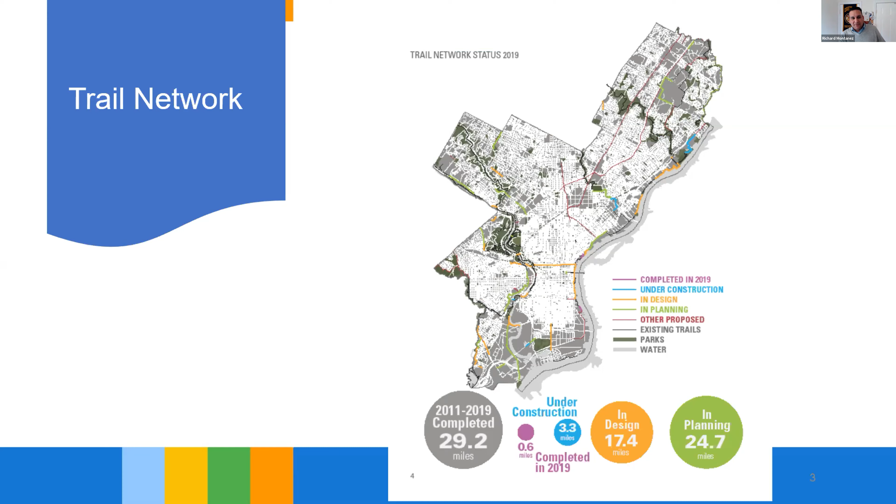This works great because it connects to and adds to the great trail network that the City of Philadelphia has, and we continue to grow it. So we keep expanding the high quality bike network throughout the city and those areas where people can jog and bike safely. But what I really wanted to talk about is what Philadelphia has done in the COVID world when it comes to pedestrians and things.

We've actually provided more outdoor spacing for our restaurants and cafes. We do realize that restaurants are a vital part of this community, and they're local businesses. They're the ones out there all the time. They're the small employers who employ a lot of residents, citizens of both Philadelphia and Pennsylvania. So we decided to start working with them to come up with some ideas of how to adapt to COVID rules, how to maintain 6-foot spacing.

So we went out there and tried to reopen the restaurants safely after they were closed for about 30 days. It was tough. They were only allowed takeout. We did create temporary regulatory regulations that allowed loading zones without them having to apply for permits. All they had to do was request them at will.

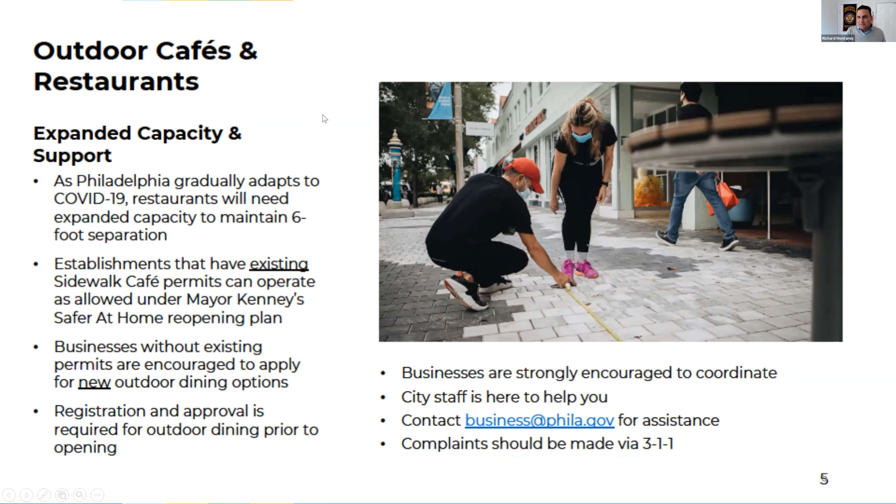So we have 4 types of what we call streeteries, and it's quite interesting on the word. It became, as there is an entire restaurant task force, the word streetery comes from because I work for the streets department. So I like the word street, and so it just ended up being streetery.

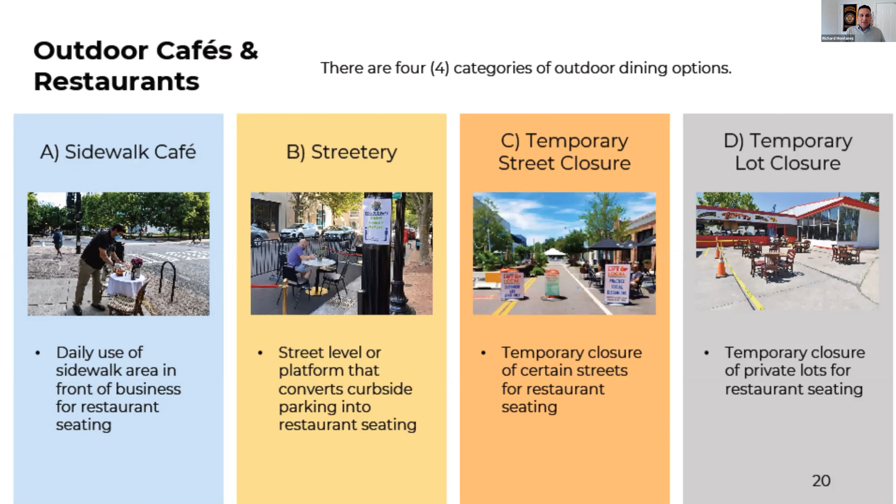So we have several types of streeteries out there: sidewalk café, what we call a streetery which is actually physically in the street where we temporarily close the streets, and then obviously we are encouraging parking lots and things like that.

Some of the drawings that we provide - this presentation is normally about 70, 80 pages long, so I had to quickly cut it down just to get it into the 10-minute presentation that we have. But what we do is we provide footprints for the businesses of what they need to do, what's socially acceptable from the City of Philadelphia, from the health department, from L&I, streets department.

So they all get this guidance that's on our website and anybody can access it. Please feel free to use it, distribute it, where it shows what you should be doing. If your sidewalk is 10 feet or more, this is what you can do. If it's less than 10 feet, we do not allow streeteries, and this has been an ongoing battle with some of them as we keep enforcing the rules and regulations. But as you can tell, I mainly kept the drawings that we provide, the layouts, as guidance for our restaurants in this presentation, to show them what they've got to do.

One of the biggest things we found during inspections was that they were putting tables on top of cellar doors. That is not permitted. We don't allow it.

It was interesting because we had to keep this very fluid as the COVID rules changed from 2 seating to 4 seating to 6 seating. The City of Philadelphia is currently back to only 4 people per table, so we have to keep our website up to date. We're also now looking at winterizing, putting in outdoor heaters—some gas, some electric, some propane—so we've been working with the fire department to see what's allowed by code.

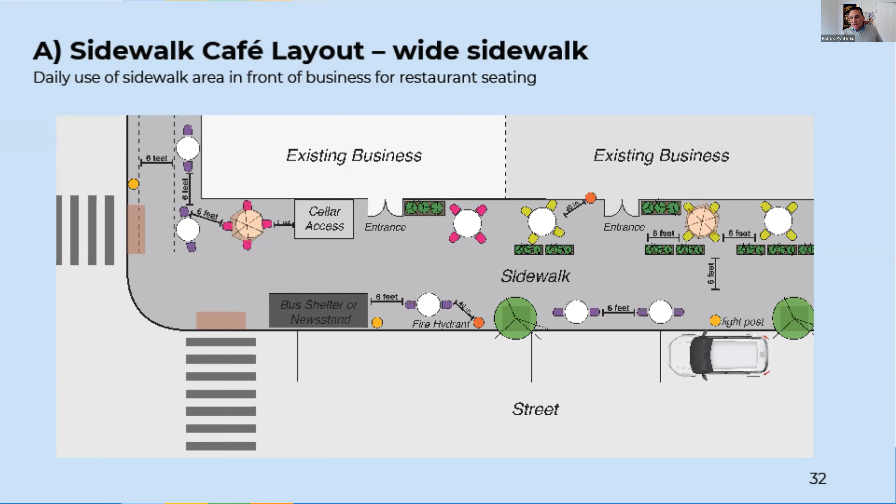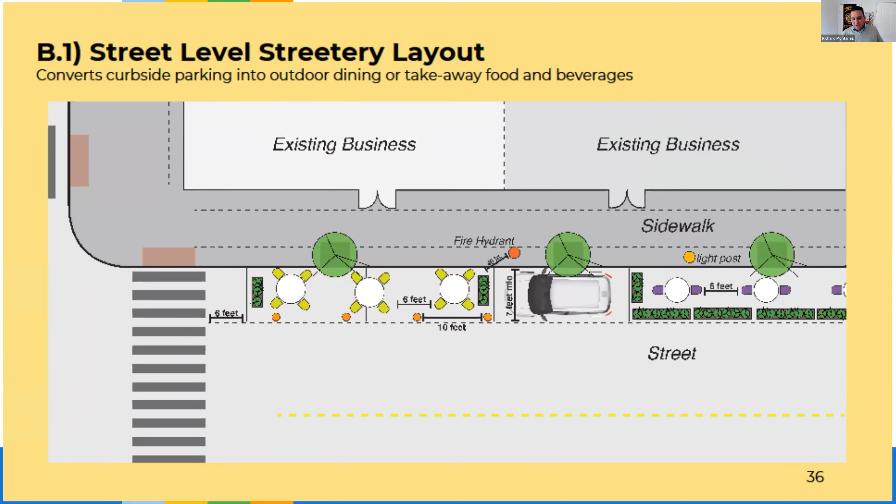This is one of the first streetery examples we provide. As you can see, we still provide some parking, and you have to keep certain distances from the fire hydrant—you have 7 feet to go. There are barriers we're asking them to put in, crash-worthy barriers, so people feel safe eating out there. If you walk through Philadelphia, you'll see these keep changing as we head into winter.

Some are starting to build platform streeteries. This came about because of the ADA issues we were trying to address at the same time. So while you were still eating outside, we wanted you to have ADA accessible tables. If you have one on the sidewalk, we consider that your ADA accessible table. If you're using the street, we were requesting that you make that ADA accessible.

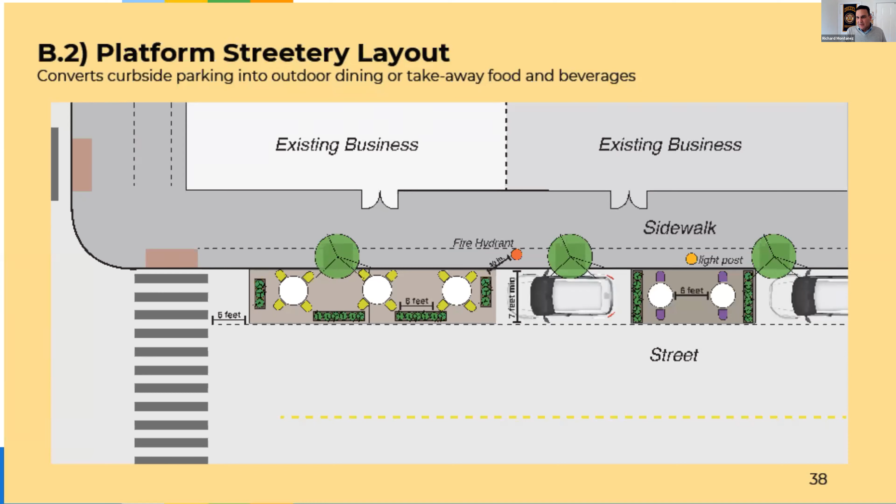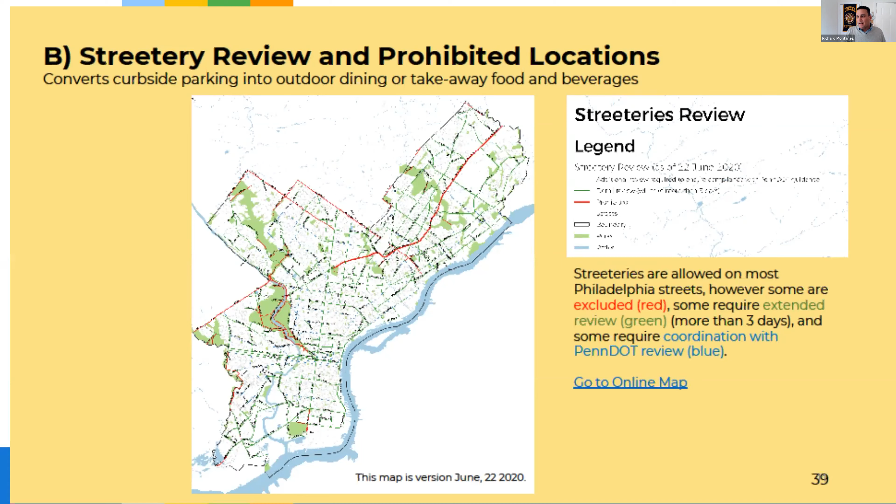We also put out a map—I apologize, I tried many times and it keeps coming out blurry—showing the areas where streeteries are completely prohibited. This was quite controversial in the beginning. Most of these are state roads where streeteries are prohibited, like Broad Street and Market Street. However, if your sidewalks are wide enough, you are allowed a sidewalk cafe.

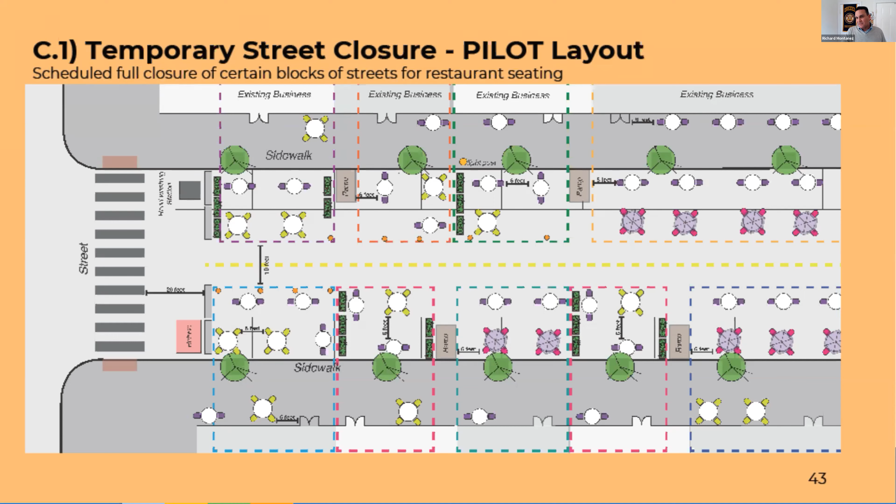Here's an example of a street closure. We do something like this in our Midtown, where we completely close the street down and put in a 10-foot pedestrian and bicyclist walkway. There are signs up, and bicyclists are encouraged to walk their bikes through this block, but in the meantime it provides access to everyone. As you can see, we also provide ramps so everybody can be accessible.

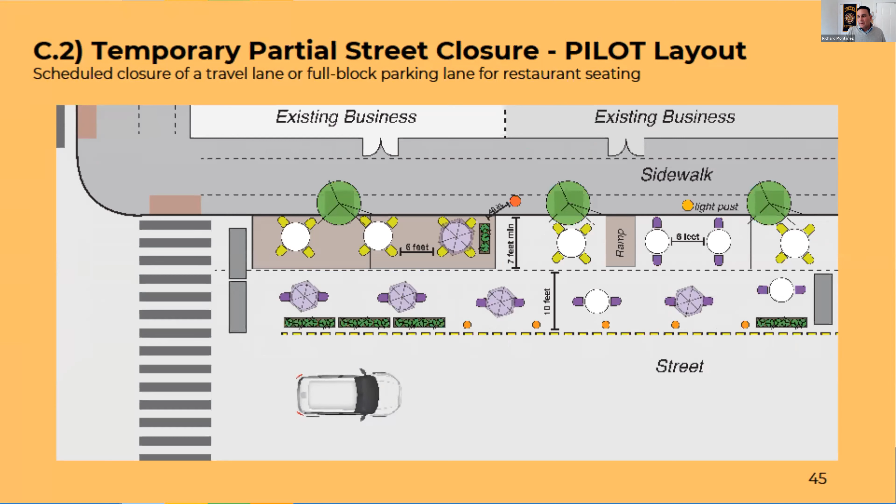This is a partial example of what we're currently trying to create. We're doing samples of this on Rittenhouse, where we're allowing one travel lane while still providing outdoor dining for restaurants. We feel this is going to be the ongoing example of what the City of Philadelphia will probably remain as.

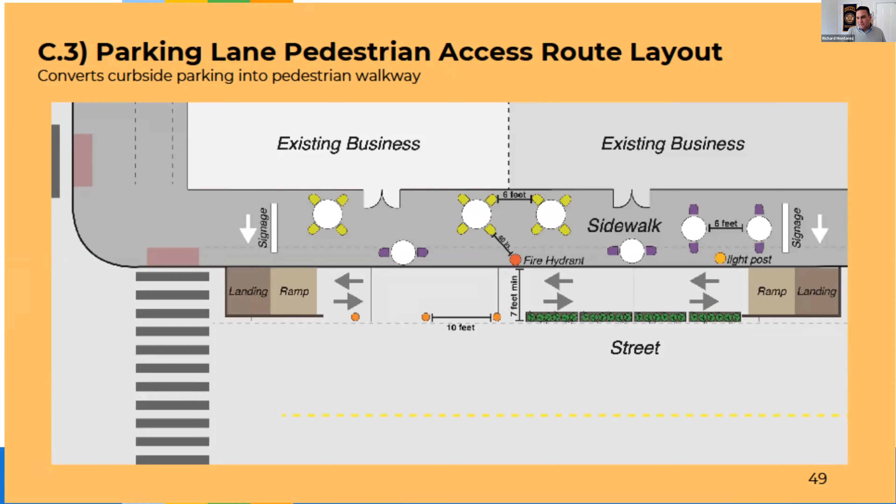Obviously, there are some cases where instead of using the parking lane for a streetery, it actually becomes the pedestrian access area—providing the proper pedestrian and ADA accessible area while still addressing businesses and things like that.

We also encourage private parking lots, and we work with them as restaurants bring tables from inside out and put them outside, to maintain social distancing, make sure all the proper COVID regulations and rules are in place, and that they're still able to conduct their business and serve people.

There will be more of these as we winterize the areas. We're dealing with tents, air exchange, airflows, and all the necessary requirements from the health department.

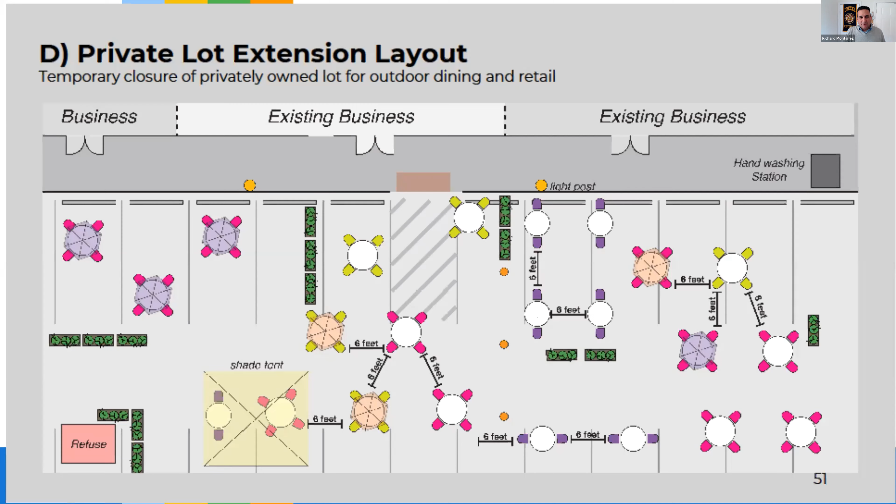With that, I'll try to move quickly. I'd like to say I was the one who did all this, but I didn't—there are literally 30 of us from the City of Philadelphia working on this every day, going out there, inspecting streeteries, and looking at how to make it better.

I want to tell the group that one of the biggest things—on Tuesday I was out at Manayunk Main Street inspecting streeteries—and everyone came to us and said, can we keep them? Because these are actually slowing people down. One side effect we've noticed from doing streeteries is that vehicular volumes have completely slowed down. Where we used to have 25 to 30 miles per hour, they're now going 15 to 20 miles per hour in the areas where the streeteries are. So we feel the safety impact is there. We just want to make sure we put a proper design in the public right of way that both FHWA, PennDOT, and the city would accept, to make it safer for everyone.

So with that, I want to turn it back over to the group because we're waiting for questions at the end, and I believe I got it on time. Thank you.

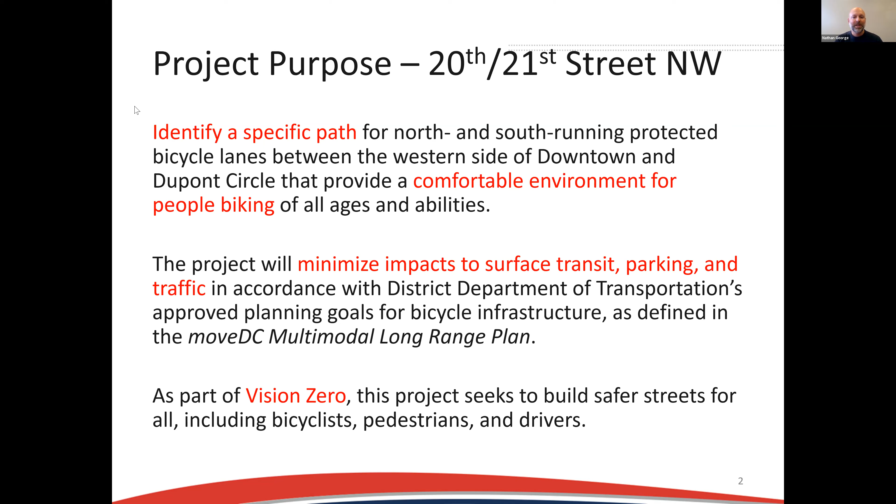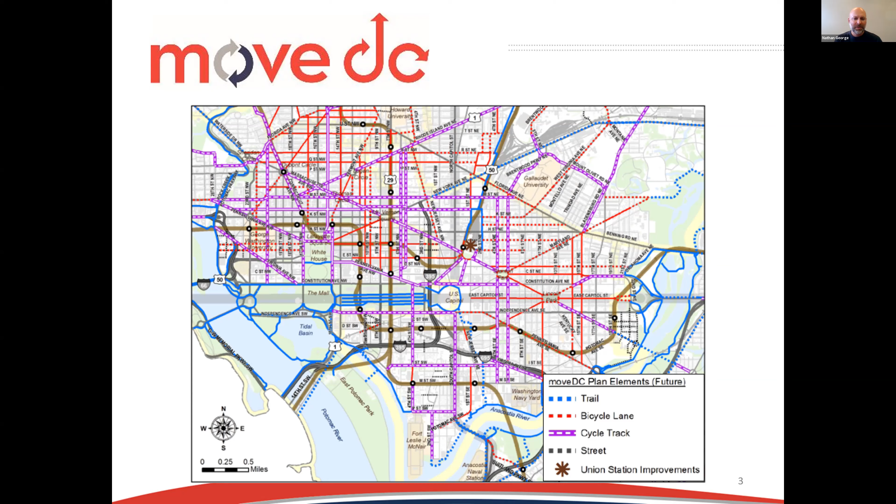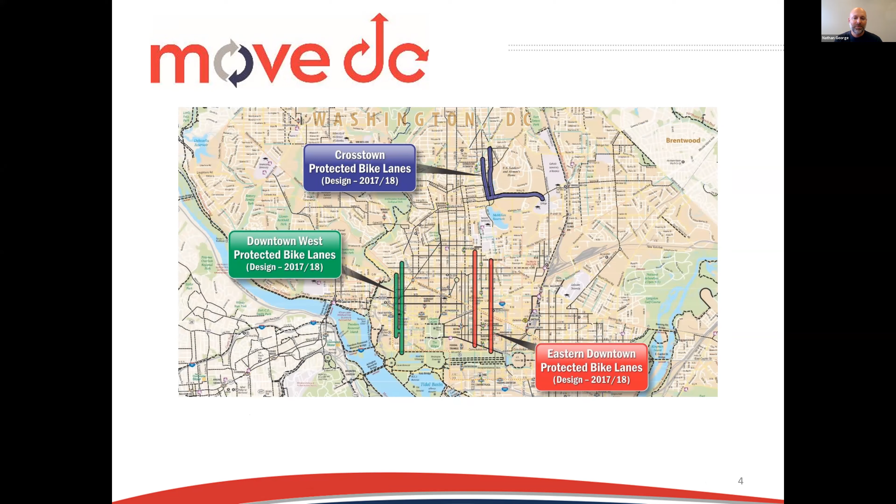Our task included 3 separate areas of DC. It was roughly 10 or so miles of area that we were covering, doing planning and design for these key facilities. We'll focus primarily on the lower left side, the green bike lanes in Downtown West, but we'll also have some highlights from the crosstown shown in blue at the top, and the red lines, the eastern downtown section. So I'll touch on each of those, but primarily we're focused on the green lines.

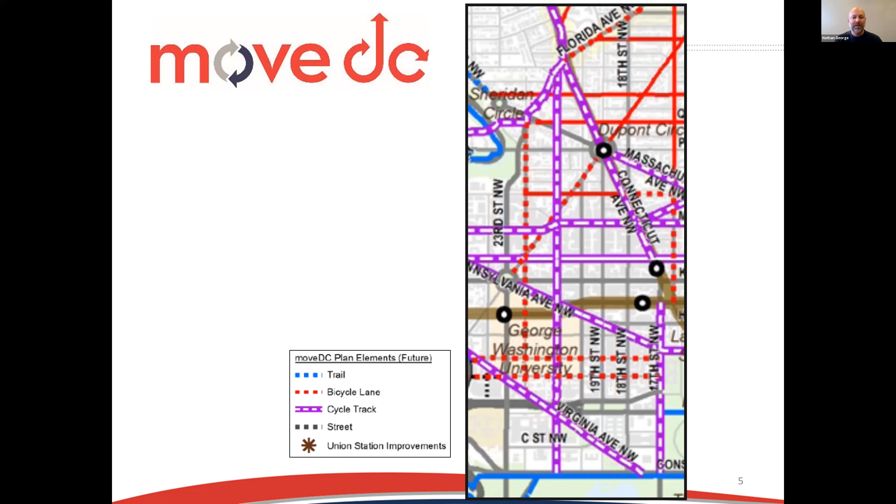In the Move DC plan, that plan envisioned putting a facility on 21st Street, the purple line that goes north to south, shown in this excerpt from the plan. When we initially started the task, DDOT came to us with the objective: let's look at that corridor, but let's look at the parallel streets to see where the facility would be most appropriate, and also what the appropriate design of that facility would be.

So we had to identify the appropriate street and also identify what the facility type would be. One highlight that really stands out when you look at this map showing the existing bike infrastructure is that there's good east-west connectivity and a little bit of diagonal north-to-south connectivity in the northern portion of the study area, but there really is no north-south connectivity. That was the focus of our assignment.

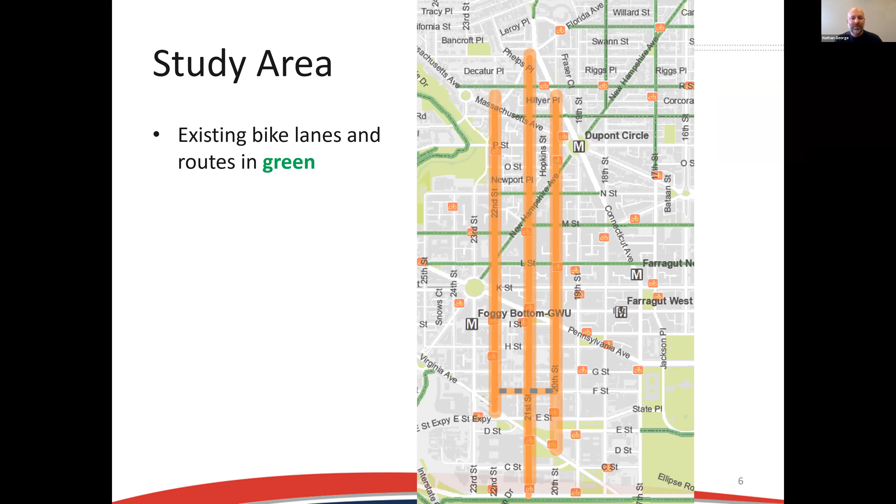When you get started on a project like this, it's very nice to have the opportunity to study and determine what's appropriate without having a pre-described facility to design or plan. Having multiple opportunities—different streets we could look at, different facility types we could incorporate—was very beneficial. Fehr and Peers started with a very robust analysis of the opportunities along each of the corridors, and some high-level considerations to help us pare that down to a more manageable task of reviewing individual facility designs.

We couldn't look at everything in a detailed design, but we could at least conduct a screening, and that's where this flow chart comes in. We knew that providing one-way bike lanes on multiple streets would be too impactful, since that would require a lot of parking impacts. So it really limited us to looking at two-way facilities.

To look at two-way facilities, we needed to look at the impacts along each street on either side to identify a preferred side of the street to review. We were looking for things like parking impacts, high volume driveways, or any condition along the street that would be an obstruction difficult to design around.

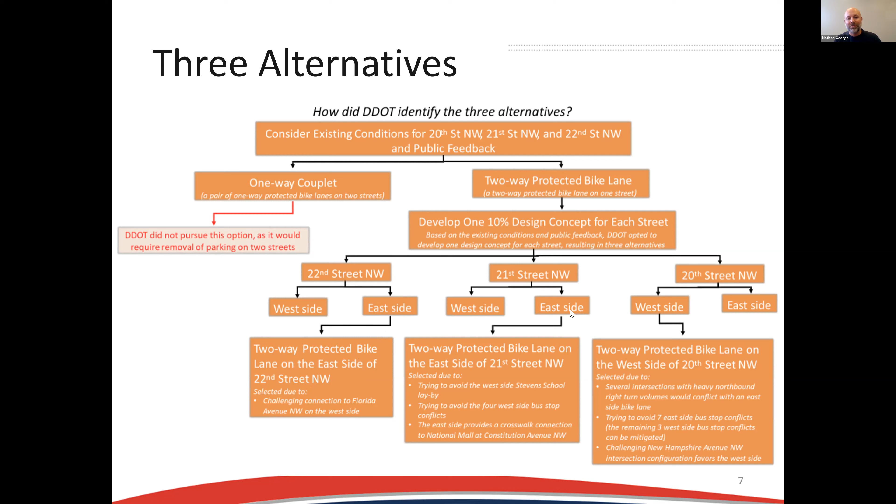Through that flow chart process, we identified three facility types that made the most sense: 22nd Street on the east side, 21st Street on the east side, and 20th Street on the west side.

The next step was to take those initial high-level reviews and put them into practice, so we developed roll plots. Fehr and Peers developed the roll plots initially, with some input from our folks looking at traffic, operations, and parking, to really start to drill down on what the impacts of that facility would be if implemented at a high level, just at a concept level, so we could nail down the trade-offs as we compared each alternative and came up with a preferred design.

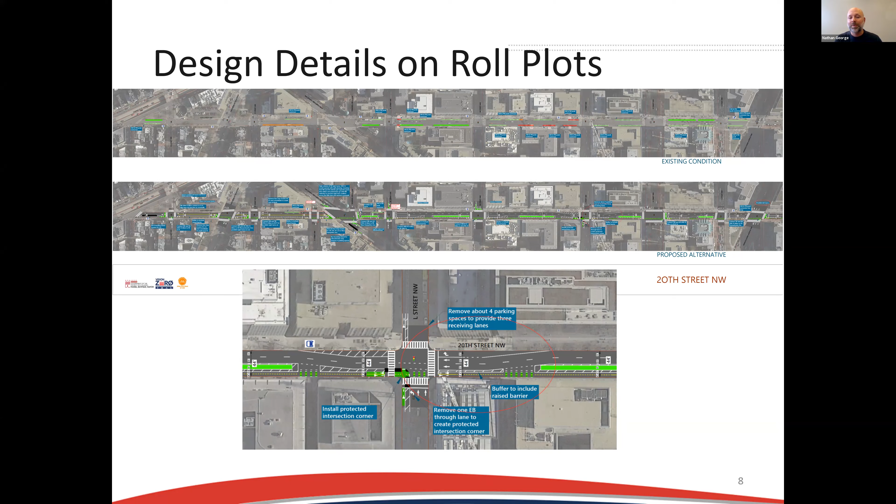That requires a very robust look at the trade-offs and impacts that need to be evaluated, not just from a design perspective, but also from a safety and operations perspective. So we looked carefully at a number of metrics to provide both a qualitative and quantitative evaluation of each alternative.

Just to highlight a few details: we looked at where we have left turn conflicts, and traffic volumes to see how many turning vehicles would conflict with that facility. That helps quantify where we have high volume conflicts versus low volume conflicts. We also looked at mitigation strategies like separated signal phases, so we could identify where we needed more detailed traffic engineering countermeasures to make the facility safe, or where that facility type might not be as appropriate.

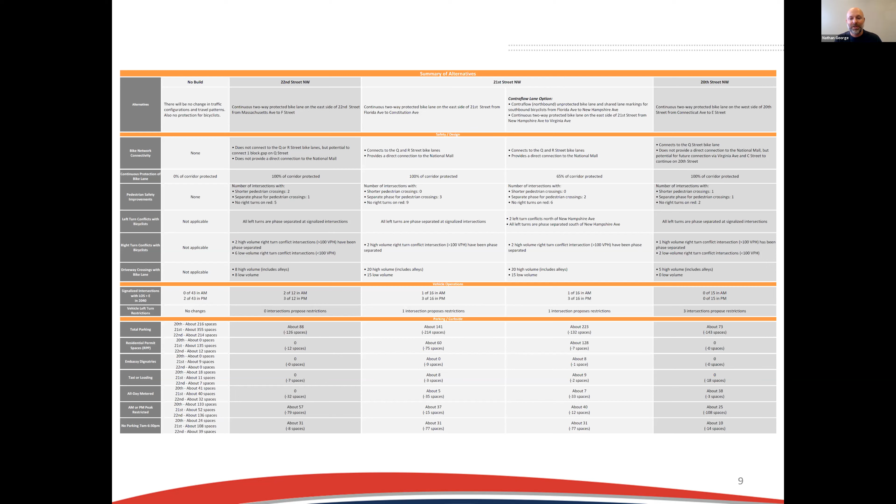We also did a complete inventory of the parking, looking at parking utilization and turnover, to make sure we understood not just where parking impacts occurred, but where we might have some capacity in the corridor, and where special curbside uses like taxi or loading existed. We had to account for all of those.

This is from the Eastern Downtown study. One big highlight from reviewing those two corridors was that we also looked at any design challenges, anything that didn't meet design minimums, what we'd consider a design waiver or exception. We screened all of those, which helped us compare the two corridors, which is important at the concept level to see where you might be making exceptions to design standards that favor one corridor or facility type over another.

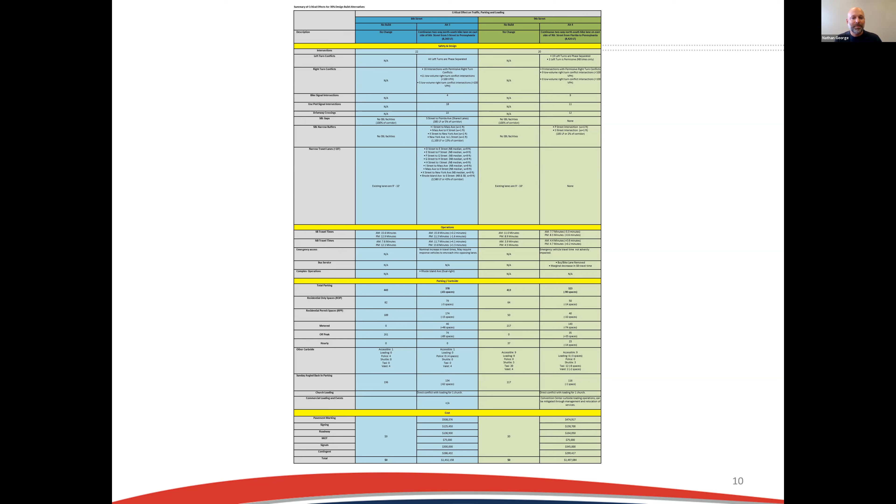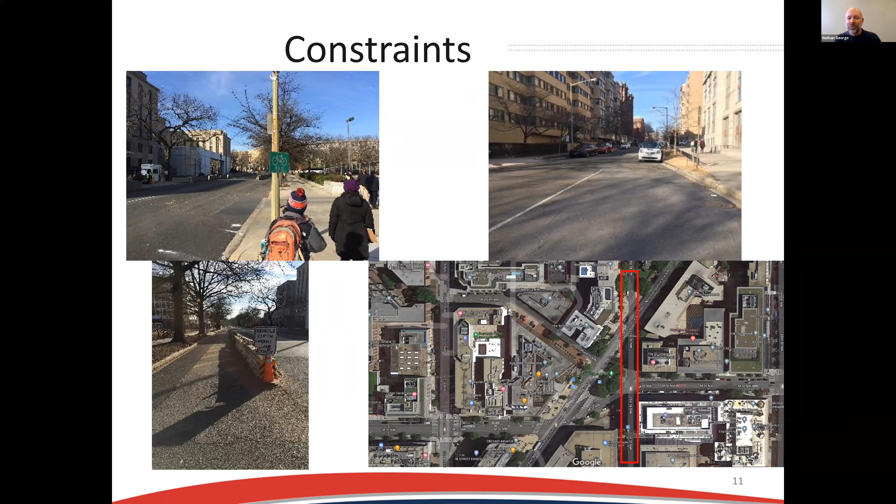A couple of representative photos to give you an idea of the area we're talking about, which is downtown DC, a very urban environment with a lot of special curbside uses, downtown pocket parks, and big buildings located adjacent to wide and sometimes narrow sidewalks. There's a lot of that urban infrastructure in this 21st and 22nd Street example I'm primarily emphasizing, but we also had varied environments in the other corridors, more similar to a suburban type environment.

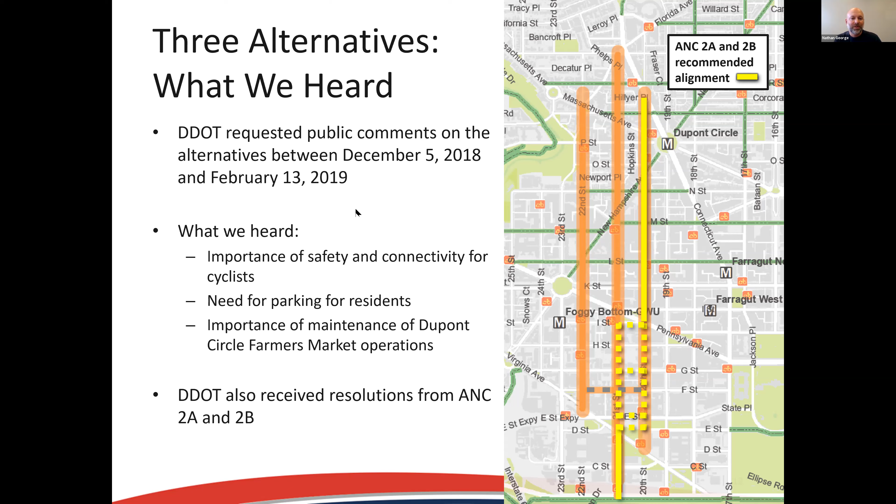There were a number of concerns about interconnectivity with the other facilities in the corridor, so there was a lot of push to make sure the facilities were all interconnected. What we ended up with was a hybrid facility where we provided the design on 21st Street south of G Street, and then provided a facility transition on G Street to go up 20th Street to complete the connection. That was a real complication towards the end of the project, just to make sure we could facilitate that transition between the two streets.

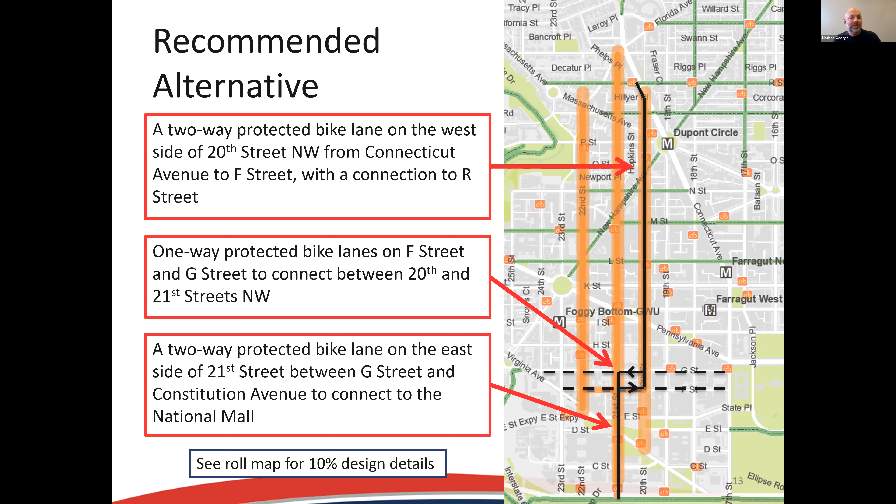But what I consider to be a very valuable lesson from that process is having that flexibility as you're working through the evaluation process, making sure you can react to the input and find a design that's workable to get into implementation.

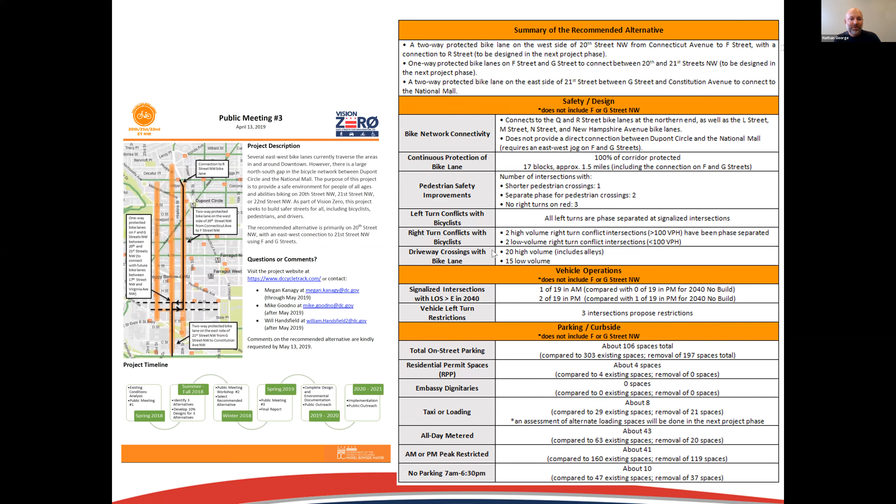As we worked through those details, we refined and produced the metrics that I shared with you earlier just for the preferred alternative, so the community could understand the impacts, how much parking was taken away, and considerations like reduced level of service at intersections. All of those details were shared out in an outreach. This was the front and back of our flyer, just to share that information with the community.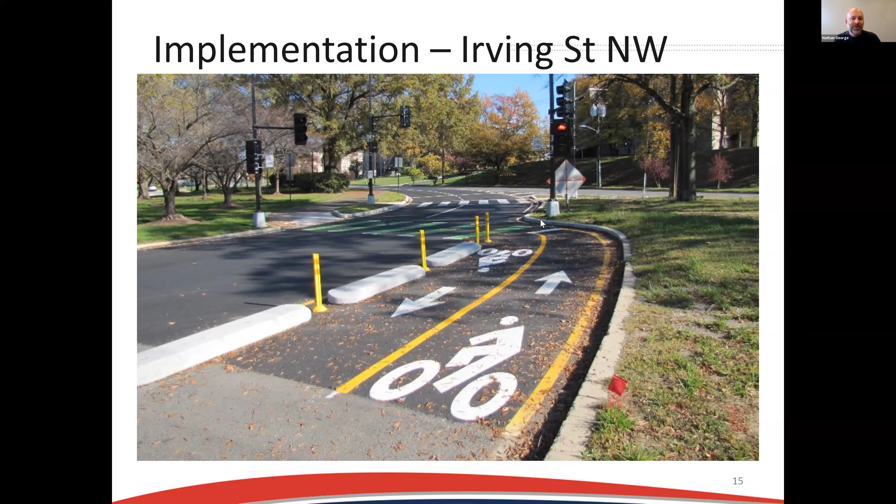To close, I'll give you a couple of highlights from the areas that have been implemented. This is the Crosstown or Irving Street project where we did a separated bike lane that was median located. This is showing a transition to a shared use path at one of our termination points, where we had signalization to accommodate a facility transition.

And here's a picture from the overpass. We went through an interchange on this facility design, so that shows where that facility was median located, running through a cloverleaf interchange, which was a pretty easy exercise of just putting down these pieces of infrastructure to separate folks, but it does require a lot of consideration at the intersections that we had to go through, like that previous example.

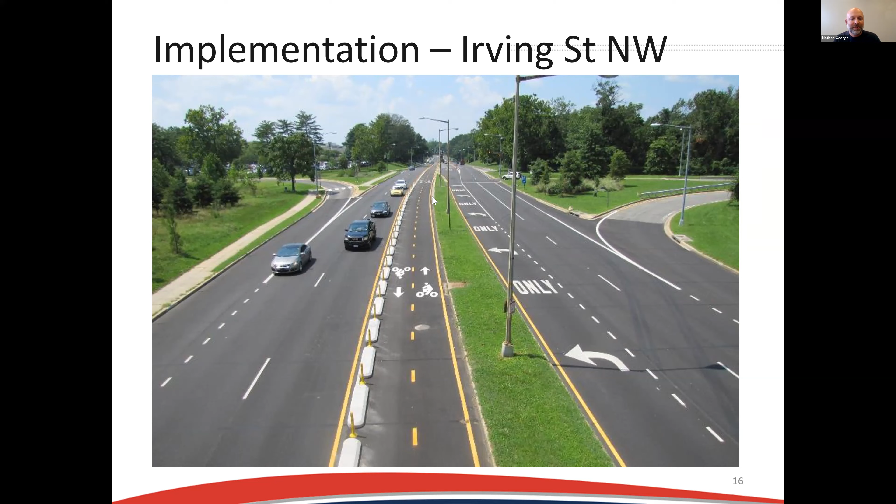Final example here from that 21st and 22nd Street design. This is a portion that was just implemented, and DDOT is continuing work on that to get that facility complete as well. That concludes my presentation. I'll be happy to discuss in more detail in Q&A.

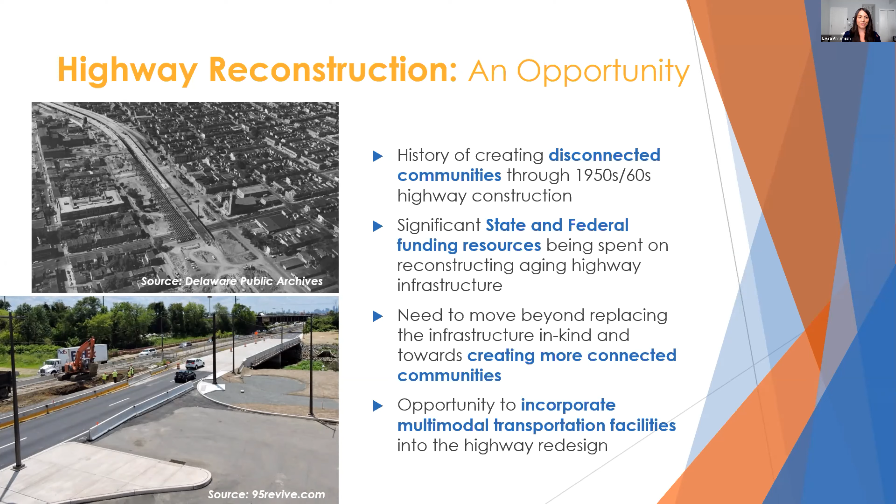For context, if you think about the I-95 reconstruction project here in the city of Philadelphia, one piece of that is costing around $2 billion, another piece is costing $5 billion, and this I-83 project is costing over $1 billion. So adding in some bicycle and pedestrian facilities, as one of my favorite project managers likes to say, is just pennies.

The I-83 Capital Beltway project is a major highway widening and reconstruction project through the city of Harrisburg, just south of downtown. Currently the highway operates as a divider between two residential neighborhoods, Allison Hill and Southside. The project was in preliminary design when the city reached out to us, because they have a lot of bicycle and pedestrian facilities that they want to see in this area, and wanted to think about ways to incorporate that into the design of I-83.

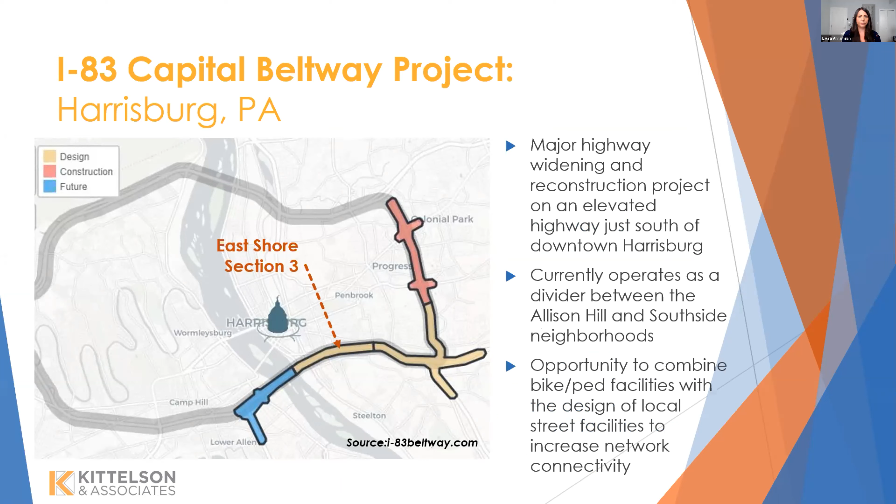So we took a comprehensive look at the larger study area outlined here in blue, and at where the crossings of I-83. We started by looking at what are the previous proposals for bicycle facilities in the study area. What's on the wish list from the city, and what are they looking to achieve in the long term?

We really did an analysis of the existing and proposed network using the bicycle level of traffic stress methodology, as well as other existing conditions like traffic volumes, crashes, and current conditions, to get a sense of what is the ideal proposed bicycle network throughout the entire study area.

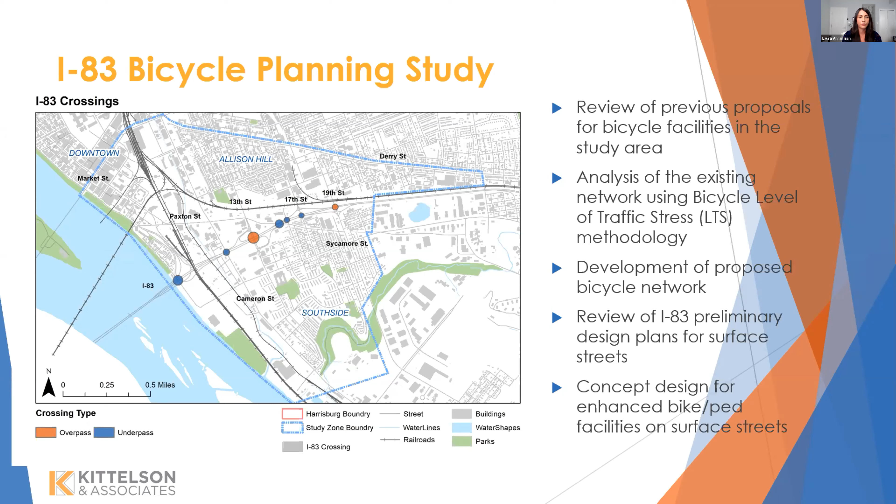Once we have that proposed network, we can drill down to the crossings of I-83 to see where we cross 83 with that proposed network, and what can be done at the cross sections of the underpasses and overpasses of the highway to incorporate designs for those proposed facilities into the final design. To do that, we developed concept designs for enhanced bicycle and pedestrian facilities on the surface streets where they cross I-83.

A key component of the analysis was looking at the bicycle level of traffic stress. For those not familiar, this is a measure of connectivity of the bicycle network via facilities the average person would feel comfortable using. We wanted to make sure we were looking at this as a network and not just individual pieces of bicycle facilities - how does that network operate as a whole?

Where can people get to using that network, with a real focus on the low stress network, wanting facilities that the largest number of people can use - that 60% interested but concerned category of cyclists. What are facilities they would feel comfortable using, really looking at what is there today and what could be there with proposed facilities.

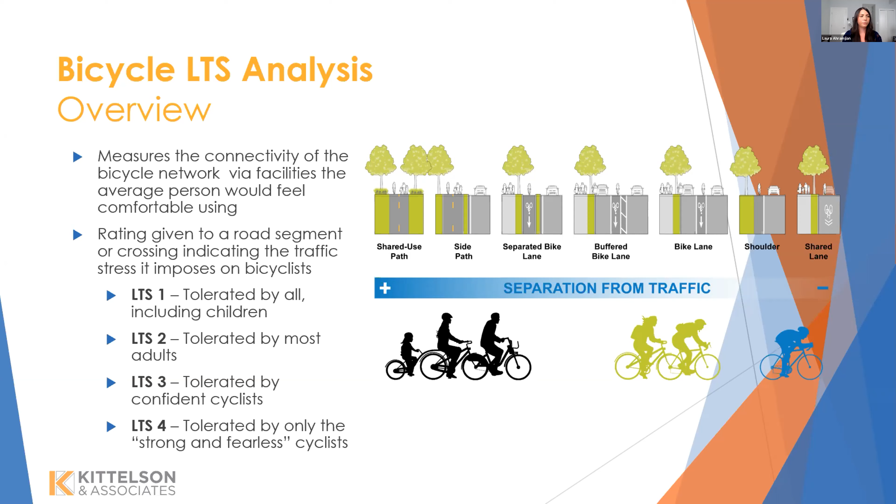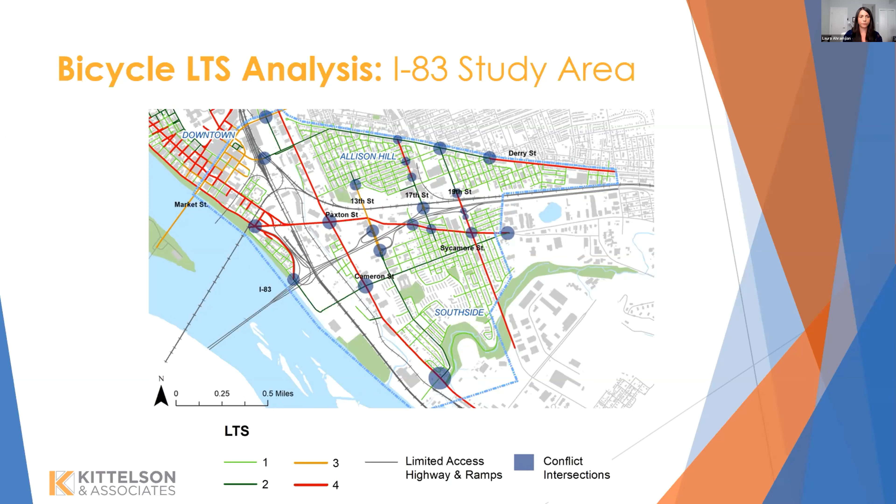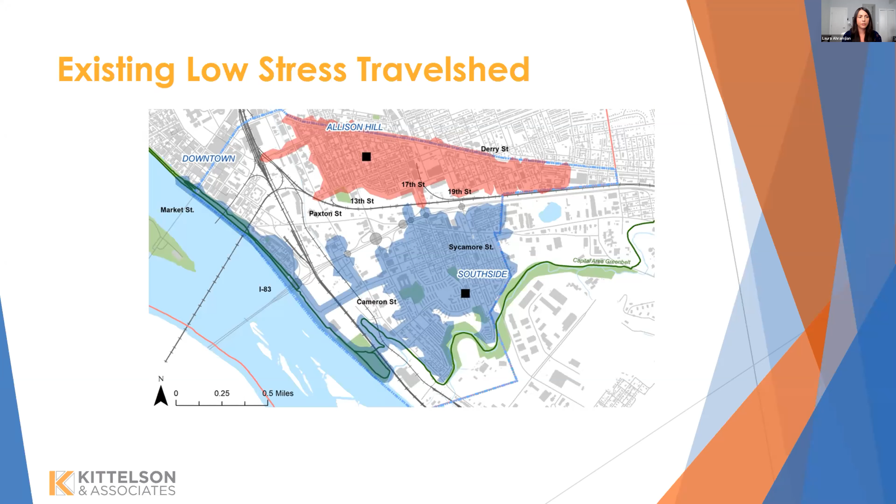So working with the city of Harrisburg, going through their previous plans and looking at what has been recommended in the past and what are some real projects that the city wants to focus on in the next few years to help implement a more connected bicycle network.

We looked at each of these, and when we ran the LTS analysis with these facilities, we can start to see a much more connected low stress network here with connections between Allison Hill and the South Side, as well as downtown and the riverfront.

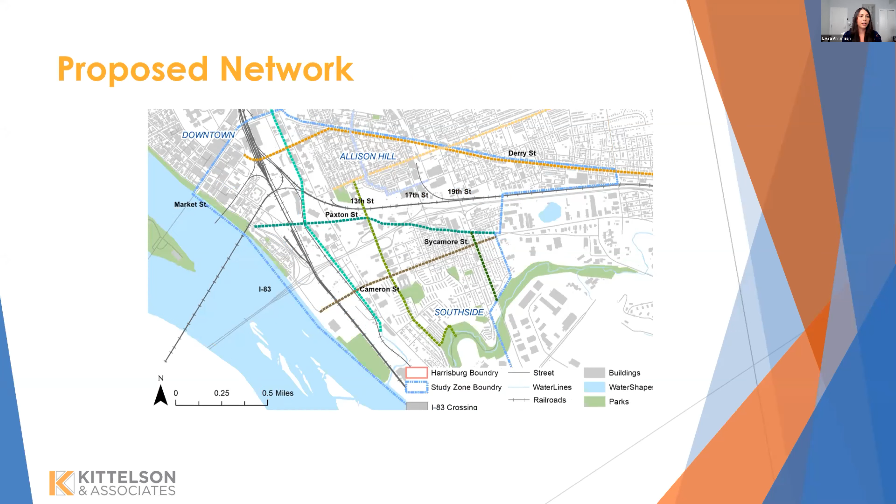So that was our marching orders in terms of these are the facilities that we really want to focus on. We identified 3 crossings of I-83 - 13th Street, 17th Street, and 19th Street - to look at expanding concepts.

Some of the highway crossing design principles we used for these concepts are to maximize sidewalk width as much as possible to create a comfortable walking environment, to divide sidewalks into clear zones for pedestrian travel and a verge area to buffer pedestrians between the adjacent travel modes.

We also wanted to separate and protect bicycle facilities where feasible. And as much as possible, we wanted to incorporate enhancements to the public realm to make for more attractive and inviting corridors for pedestrians to walk in between these 2 neighborhoods.

Looking at things like lighting, specifically lighting of underpasses for pedestrians, decorative wall form liner designs, public art on fencing at overpass levels. And Rich, who is on the call as well, is all too familiar with some of the examples from I-95, which has really served as a pilot for some of the recommendations that we developed in the I-83 study.

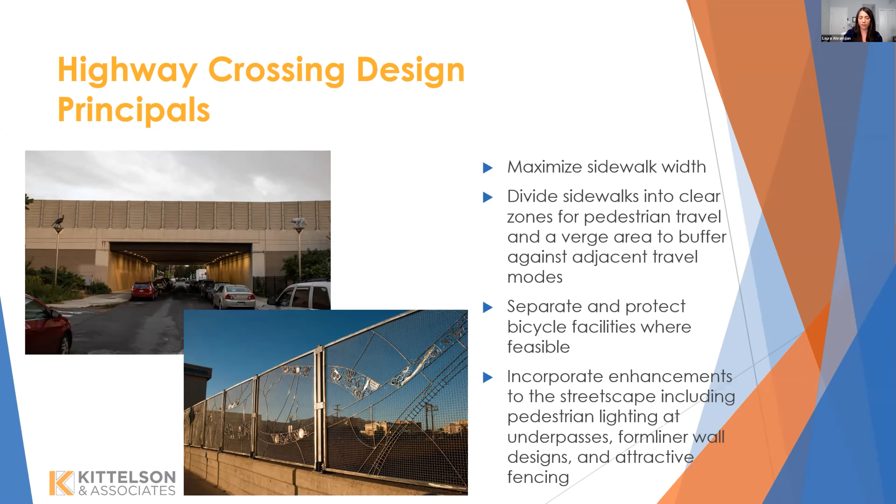So looking at each of the crossings at 13th Street and the existing condition, you can see we have pretty narrow sidewalks. There is a barrier between the sidewalk and the travel lanes, but a very narrow walkway there. Some of the spots where the pedestrians are crossing the ramps.

The ramps at 13th Street are actually going away. It's a current interchange, but those ramps are being removed. As a result, there's a significant amount of road volume that can be lessened here that's no longer going to be using the interchange. So we thought there was real opportunity for doing a bit of a road diet here.

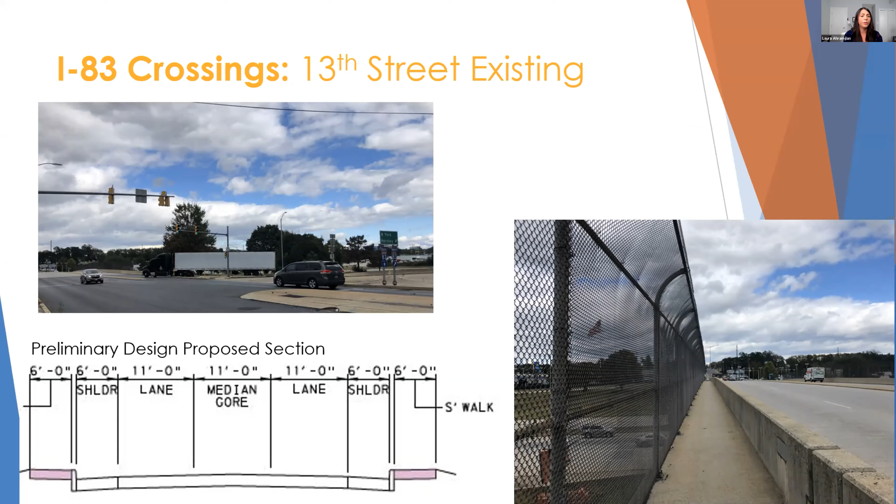You can see in the bottom left-hand corner of the slide, the preliminary design proposed section. This was the preliminary design done to date before we started our study of I-83. You can see 6-foot wide sidewalks were proposed, 6-foot shoulder, no dedicated bicycle facilities, and they also had an 11-foot median core, which, since this is going away as an interchange, we thought there could be an opportunity to reduce some of the travel lanes here.

So the proposed section we developed for 13th Street looks at expanding the sidewalk and having a 6-foot clear sidewalk zone for walking with a 4-foot verge, painted bike lanes 6 feet wide, dedicated space for cyclists, and then 2 travel lanes, removing that median core. In this opportunity, we actually looked to lessen the width of the proposed bridge section, and we also looked at doing decorative metal fencing on the overpass.

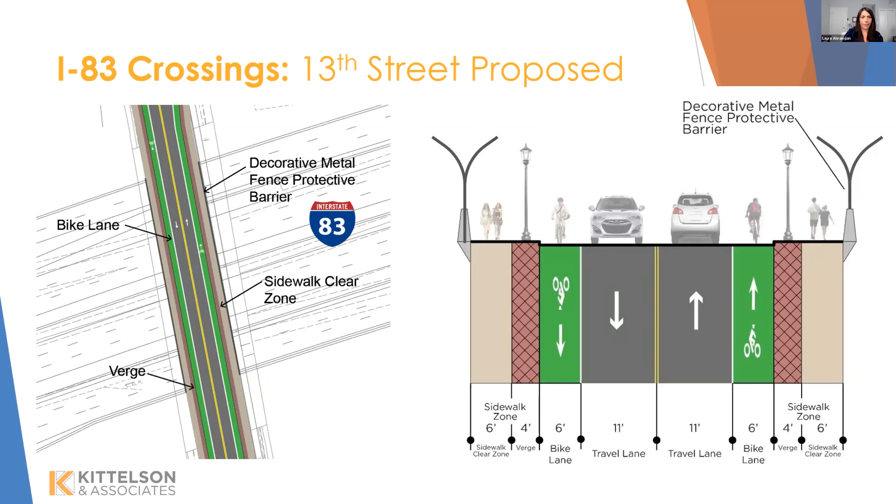The next location is 17th Street. This is an existing overpass over 17th Street. As you can see, the overpass doesn't have any lighting in it, so it's very dark for pedestrians. There is, just north of here, the heart of the Allison Hill neighborhood, which also has a complete streets project that the city is looking into that's just happening to the north.

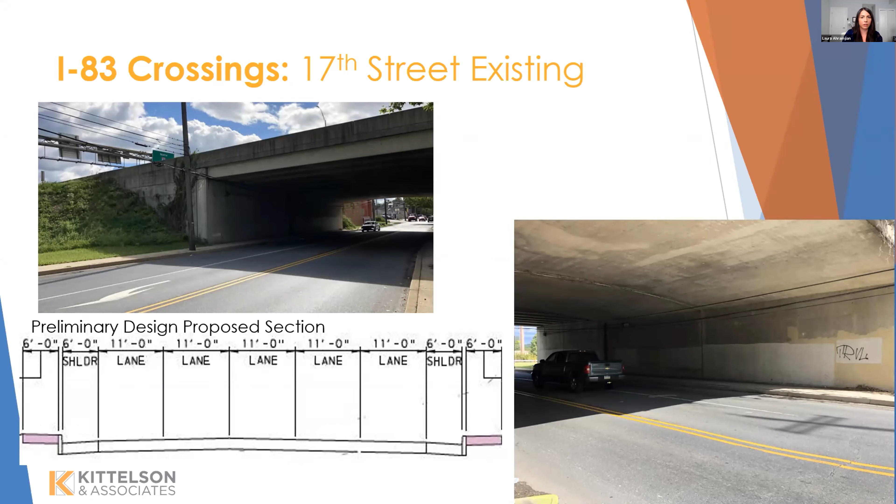And this was also a location where the ramps just to the north of the highway proved to be very difficult for pedestrians to traverse with the angle of those crossings. So what we looked at doing here was extending that complete streets concept that's being developed north on 17th Street down here

to the I-83 crossing, creating a 14-foot sidewalk zone with 4-foot verge, a Jersey barrier separating the pedestrians from the travel on 17th Street, decorative pedestrian lighting, and decorative form liners on the walls. We also looked in more detail at the location of the crosswalks and the ramps here, to try to make those movements a little bit simpler for pedestrians and easier to traverse.

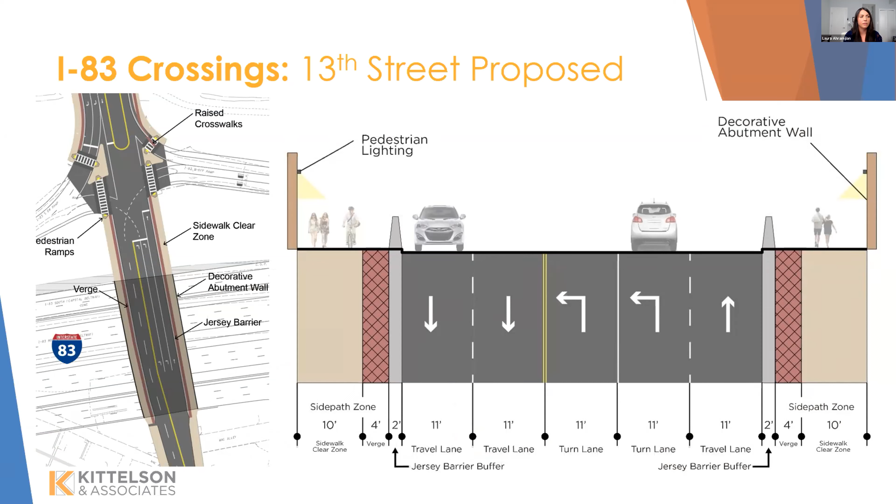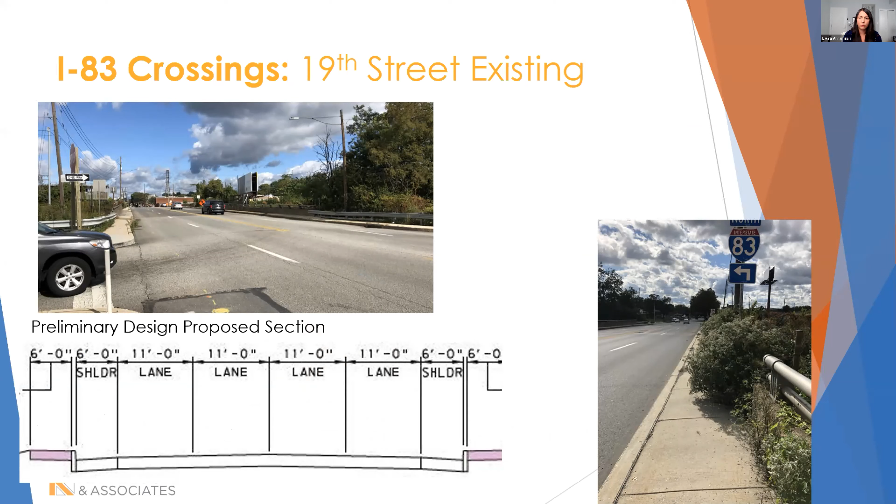And the final one that we looked at was 19th Street. This is where the city had proposed a protected bicycle lane to the south of here. So we looked at extending that facility up to 19th Street. You can see the current proposed design from the preliminary design showed 6-foot shoulders, 11-foot lanes, and 6-foot sidewalks.

So in our proposed section, we have a protected bike lane directly adjacent to the sidewalk. Once again widening out that sidewalk as much as possible, adding in decorative metal fencing for the overpass, and protecting both the bicyclists and the pedestrians from travel lanes with a 3-foot raised curb. This design would widen the bridge section by 14 feet.

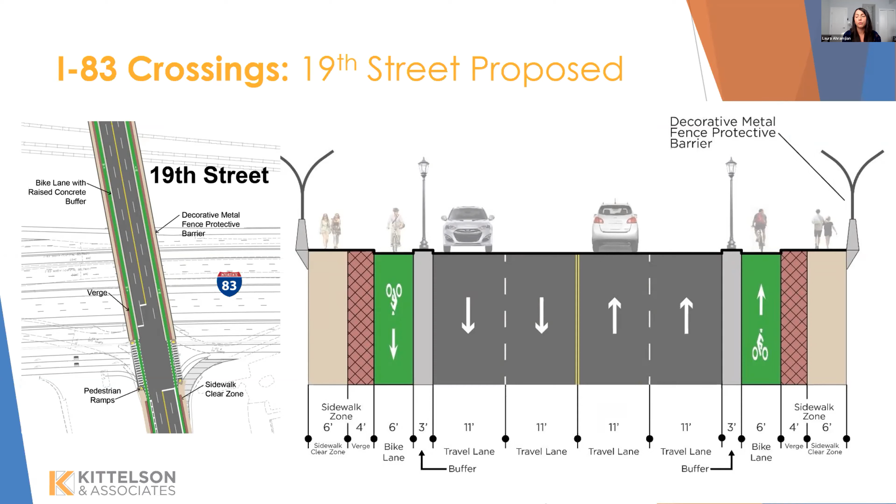As a result of this, the city of Harrisburg was able to take these concepts to PennDOT and their engineers and work through. I wouldn't say we got everything we asked for, but they were able to incorporate a lot of the proposed improvements, especially the bicycle facilities, some of the decorative treatments. We didn't get quite as wide sidewalks as we were looking for, but we did get a lot of improvements for the pedestrian and bicyclist realm here.

Some of the takeaways I wanted to give you: comprehensive planning to identify a preferred multimodal network is key here, instead of just looking at specific spot locations and saying, oh, we'd like to add this or that here, this would be good for a bike lane. How does it connect to that overall network that a community is trying to implement over time? Having early and ongoing coordination with the final design team, the sooner you can get these types of improvements included in the highway design, the easier it is to incorporate, and the easier it is to make sure it's not value engineered out later on in the process.

And just really thinking about how you can leverage these very significant infrastructure investments to make long-term improvements to the multimodal network. This is the kind of reconstruction that comes along once in a generation. And if you miss the boat, you aren't going to get those bicycle facilities, you're not going to widen the bridge later on. So this is the chance to do it when it's in design, and to really keep pushing those types of improvements forward.

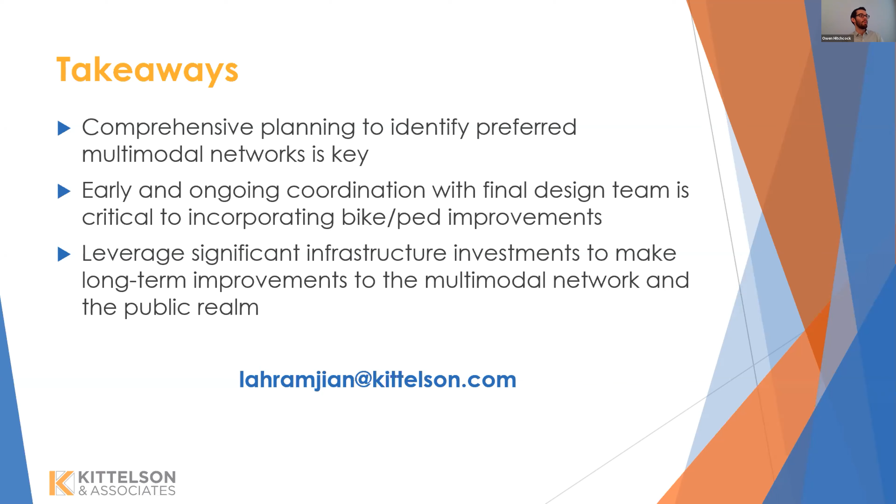Do you have any recommendations for incorporating pedestrian sidewalks or bicycle facilities through a limited access interchange overpass of two limited access highways? Or should bike and ped facilities be avoided within limited access highways?

Okay, so I'd say as much as possible, avoiding limited access. I mean, is this a crossing, or is this actually incorporating the facility within a limited access roadway?

Let's say a crossing. I think if there's a crossing, this is something that I know in the Pennsylvania Active Transportation Plan came up a lot - how we're handling crossings of these high volume roadways. I don't have anything quick and easy off the top of my head.

I think each one of these is a different animal. In general, where you can have more protected facilities, the better. As we're thinking about these high volumes, high speeds going through, the more protection that you can offer, the better off you're going to be. Any sort of mixing in that environment is just not going to work.